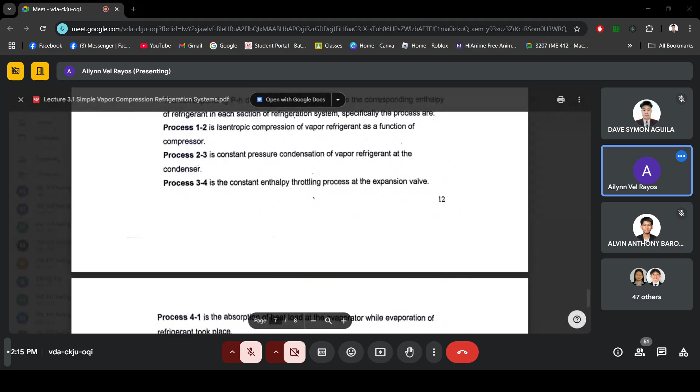Okay, so last week we discussed the standard vapor compression cycle. So ito yung naging discussion, tama ba? Yan, ito yung ginamit natin na lecture from last week. So another lecture was uploaded, additional to, kasabay nung ginamit natin last week. So discuss lang natin how or what are the modifications made in the reverse Carnot cycle, kung bakit tayo nagkaroon ng standard vapor compression cycle, which is a cycle working as a refrigeration system.

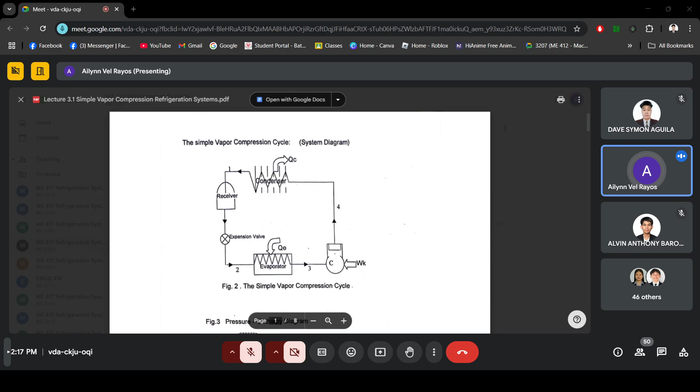So based on our introduction, ito yung ating naging lecture sa introduction, for Carnot refrigeration cycle, what component for the expansion process is a turbine. Kasi sabi nga, based on our Carnot cycle, its main component is a turbine. So ganun din yung ginamit for our reverse Carnot, we have the turbine. But there are some modifications made in the TS diagram of this Carnot cycle to make sure that this will work in an actual process.

Okay, so chat na lang sa GC, Lozelle, kapag medyo naglalag, para dire-diretso yung discussion natin. So ano yung mga modifications that was made here in the TS diagram para magkaroon tayo ng standard vapor compression cycle? So if we are going to compare this Carnot cycle or Carnot refrigeration cycle sa standard vapor compression cycle, ano yung mga naging difference? Naalala nyo pa ba yung diniscuss natin last week? Ano yung mga naging difference dun sa ating standard vapor compression cycle? So, eto.

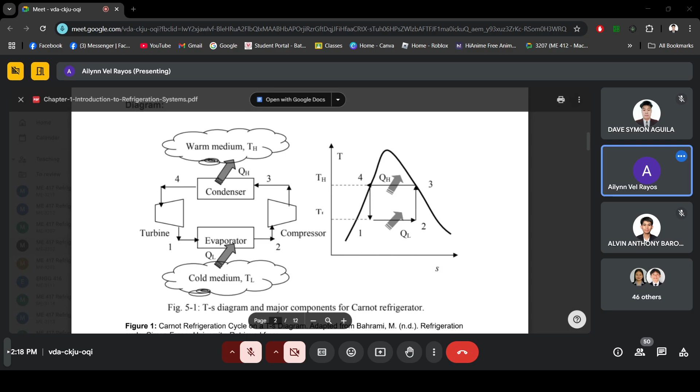Okay, so ito yung ating pH diagram. Disregard nyo muna yung numbering, no? Tingnan nyo muna yung pH diagram, yung itsura niya. So what is the difference of this? Ito yung TS diagram, ito yung TS. Kita ba yung aking cursor? Kita ba? Hello? Hello everyone? Naririnig nyo pa ba ako?

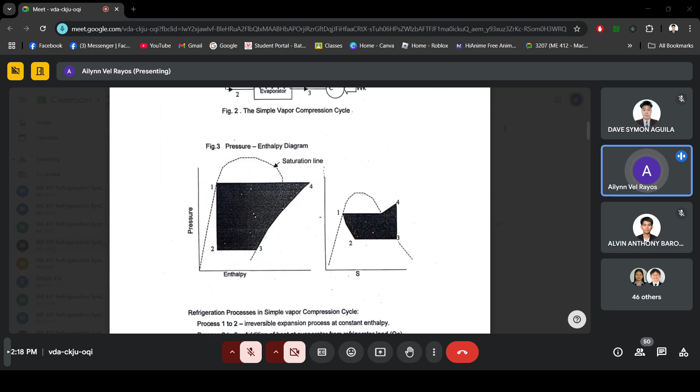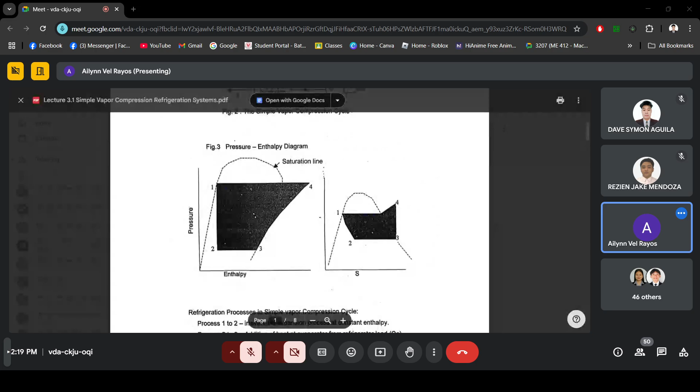Ma'am, hindi po, hindi ba kita yung cursor natin? Opo. Okay, wait lang, wait. Open natin in Google Docs para makita ninyo, kasi parang nakikita naman ata siya. Ito ba kita na? Ito, kita? Kita ba? Parang di pa din po. Hindi po. Hindi ba? Hindi po. So ganito na lang. Wait, ay, ang sara. Ito na lang, I think kita naman na. Kita kaya? Ay, bakit hindi kita? Ito, wait.

So yon, again yung TS diagram. May TS diagram naman kayo dyan, di ba, nung dinrawing ninyo nung last week? Di ba? Pero ito siya. Meron po, mahirap lang mag-share ng iba pang screen. Sabagay, hindi naman kita yung cursor natin. Pero ito yung TS diagram natin, which is tama, di ba? Same dun sa dinrawing nyo last week. Okay, tama ba? Opo, ma'am.

Okay, and then yung ating Carnot refrigeration cycle, ano yung mga nakikita ninyong pagbabago? Or ano yung mga nagbago? Kasi sabi natin, some modifications are made para maging standard vapor compression cycle siya, para mag-work siya in an actual scenario, or mapagana talaga siya in an actual component or equipment na feasible, and at the same time, tinake into consideration yung mga economic situation na meron dun sa reverse Carnot cycle. So based on the reverse Carnot cycle or the Carnot refrigeration cycle, what are the difference in terms of the TS diagram pagdating dito sa ating standard vapor compression cycle? So naalala nyo ba yung sa Carnot?

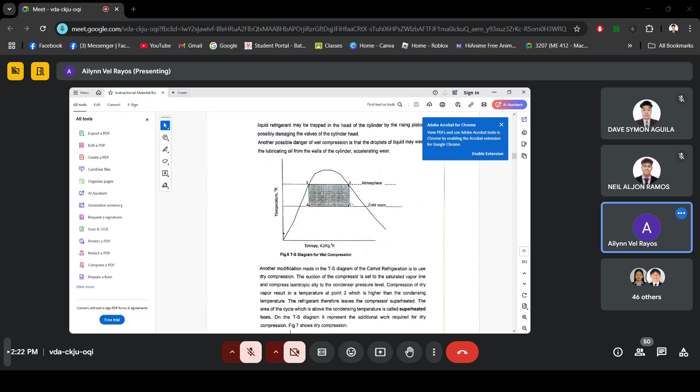Pero dito sa Carnot refrigeration cycle, meron tayong wet compression. So ano ibig sabihin natin ng wet compression? The phase of the refrigerant before it enters our compressor is wet mixture, so meron tayong combination of liquid and vapor. While dun sa standard vapor compression cycle natin, meron tayong saturated vapor. So let us discuss bakit at anong mga nangyari, why it happened.

But before that, let us review this simple vapor compression cycle which we discussed last week. So again, this is the pH and TS diagram of the standard vapor or the simple vapor compression cycle.

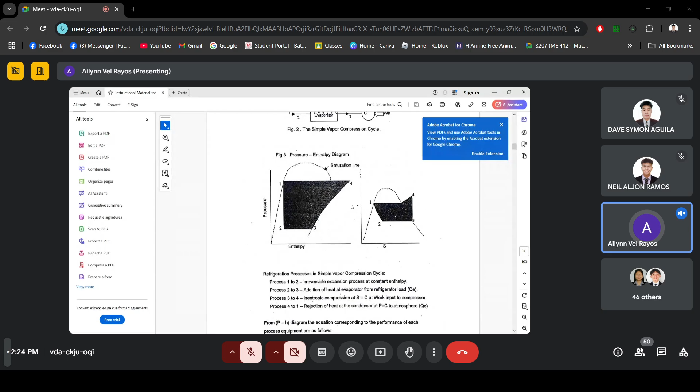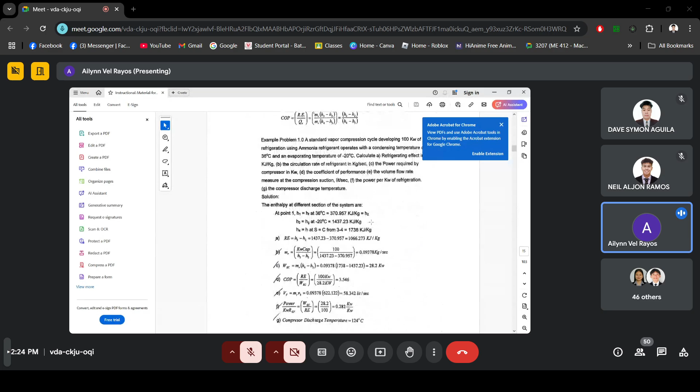This is the component, or the work cycle analysis, the cycle analysis, which is the same as what we discussed face-to-face last week. This is also the same problem we solved before, so just look at that too.

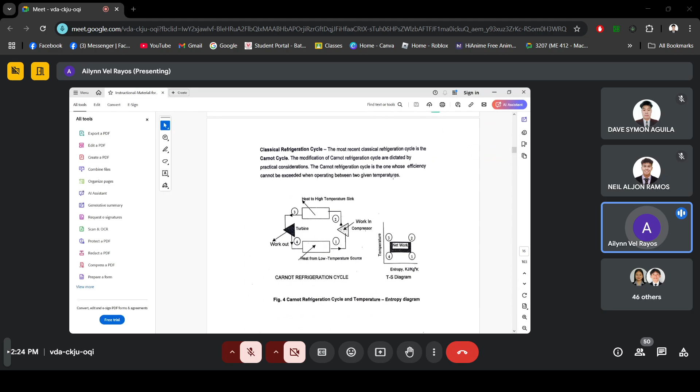This is the classical refrigeration cycle, which is the reverse Carnot cycle. The most recent classical refrigeration cycle is the Carnot cycle, and the reverse Carnot cycle became our classical refrigeration cycle. The modifications of the Carnot refrigeration cycle are dictated by practical considerations. Let's go through those considerations one by one.

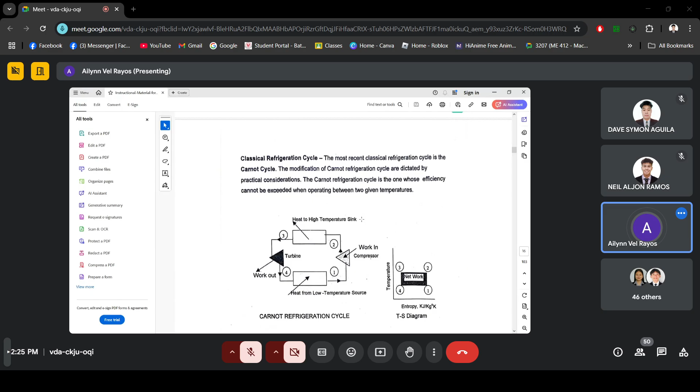The Carnot refrigeration cycle is the one whose efficiency cannot be exceeded when operating between two given temperatures. Imagine we have a saturation line here, where the saturated liquid line touches state point 3 and the saturated vapor line touches state point 2. If we base this on the pH diagram of the simple or standard vapor compression cycle, one modification we see is that after this, state point 1 is already saturated vapor.

At the same time, state point 2 has our superheated, high pressure, high temperature refrigerant - state point 2, superheated. Then 3 to 4 is the TS diagram, and at the turbine we have a constant entropy or isentropic process. In the standard or simple vapor compression cycle, it is no longer isentropic because our turbine was replaced by an expansion valve.

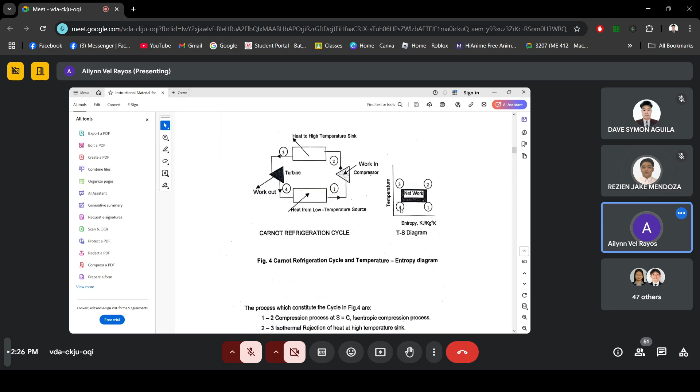This makes our process an isenthalpic process, wherein our enthalpy at state point 3 and 4 is equal. So why did these modifications happen? Let's discuss it.

This was discussed in our introduction part. So consider this other formula for the reverse or Carnot refrigeration cycle. Here, we derived T1 over T2 minus T1 as our COP, or coefficient of performance of refrigeration, which is the ratio of the amount of heat absorbed at the cold room to the net work of the cycle, as referred to the TS diagram.

And the next thing is the performance factor - you just have to add 1 to the COP to get the PF, or the performance factor.

I will give you 15 minutes to solve this problem. I know you're already aware of Q = UA ΔT, in heat transfer. You have to get the UA value, which is in kilowatts per degree Kelvin, wherein the change of temperature is 5 degrees Celsius. Please solve this problem for 15 minutes. I'll give you 15 minutes.

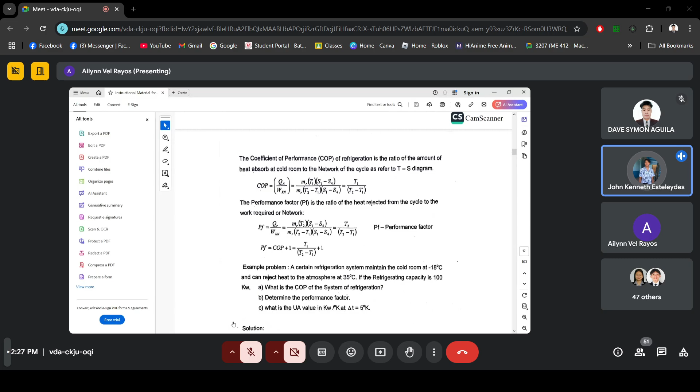A certain refrigeration system maintains the cold room at negative 18 degrees Celsius and can reject heat to the atmosphere at 35 degrees Celsius. If the refrigerating capacity is 100 kilowatts: A) what is the COP of the refrigeration system? B) determine the performance factor. C) what is the UA value in kilowatts per degree Kelvin at delta T equal to 5 degree Kelvin?

Okay, so please solve this for 15 minutes, then we'll discuss it after. This is included in our lecture today, on the whiteboard paper. Is it clear? Please give a thumbs up if it's clear to you.

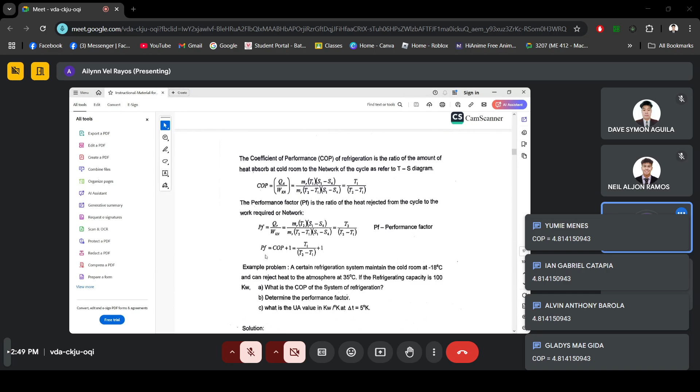This is in the lecture too, so I hope it's clear. For COP, we just use the temperature and make sure again to add 273.15. And then for the performance factor, we just have the UA value. This formula came from heat transfer, right? UA is kilowatt per degree Kelvin, or you can use it directly. Since the unit is given there too, it's more unit analysis if you're not aware of the formula, because what's being asked there is kilowatt per degree Kelvin.

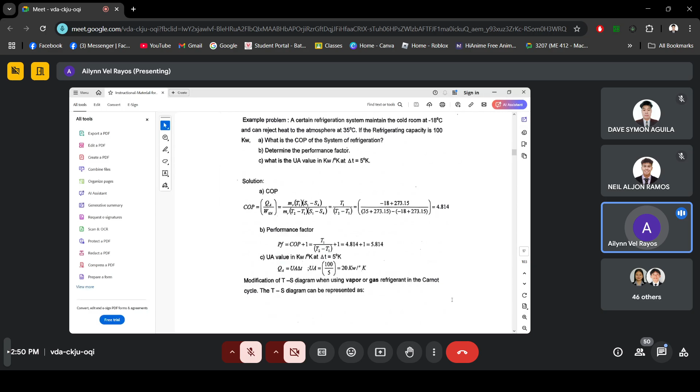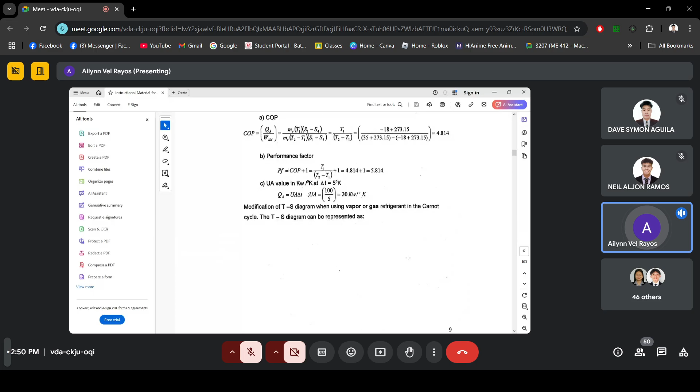Thank you. So here are the modifications of the TS diagram when using vapor or gas refrigerant in the Carnot cycle, which is represented by this one.

Okay, so since in a gas cycle, our working fluid, meaning we see it as gas, it cannot be liquid or change phase. It's really just gas. So that means if there is an addition of heat, we see it in the rising of temperature. If there is a condensation or rejection of heat, we see it in the lowering of temperature. So that's what this means.

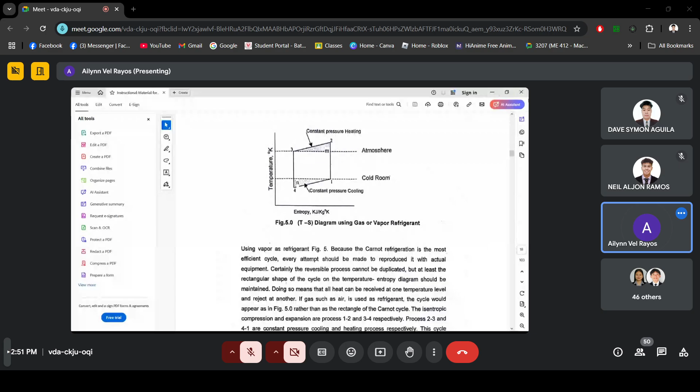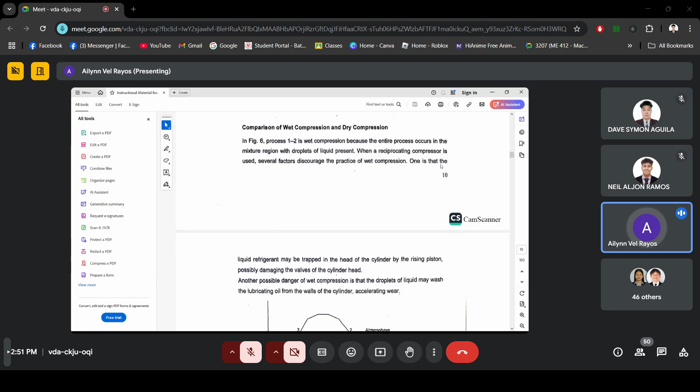So let's focus on the comparison of wet compression and dry compression. As I mentioned earlier, we see the TS diagram of a reverse Carnot refrigeration cycle is in the wet mixture before it enters the compressor. So that means in that case, we will have wet compression. At state point 1, we have a wet mixture entering the compressor.

So that's called wet compression. In figure 6, process 1 to 2 is wet compression because the entire process occurs in the mixture region with droplets of liquid present. So when a reciprocating compressor is used, these are the factors that discourage the practice of wet compression.

So that's why we transition to dry compression. So what are the several factors that discourage wet compression? One is that the liquid refrigerant may be trapped in the head of the cylinder by the rising piston, possibly damaging the valves of the cylinder head.

That's one. So to avoid damaging the valve of the cylinder head, we use dry compression, because wet compression or liquid refrigerant may be trapped in the head of the cylinder, which may cause damage to the valve of the cylinder head.

And another possible danger of wet compression is that droplets of liquid may wash the lubricating oil from the walls of the cylinder. That accelerates wear. This is related to the topic we discussed about refrigerants, in the 7th section I think, about oil and refrigerant. From that, we discussed what lubricating oils are used in the compressor.

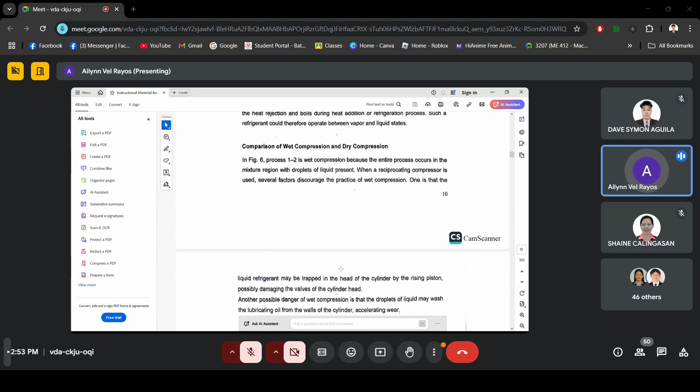So from wet compression, what we did is modify the TS diagram so that instead of compressing it as a wet mixture, we make it a saturated vapor. So another modification made in the TS diagram of the Carnot refrigeration is to use dry compression. The suction of the compressor is set to the saturated vapor line and compressed isentropically to the condenser pressure level. So compression of dry vapor results in temperature at point 2, which is higher than the condensing temperature.

So what was the result? There are two things. Aside from making it saturated vapor at the end of the evaporating process, it needs to be saturated vapor before entering the compression process. So another result is that we get...

We get high pressure, high temperature refrigerant. Because in our Carnot refrigeration cycle, when we undergo wet compression, the compression process will make the refrigerant only saturated vapor. But if it comes from saturated vapor with the same compression process or work input, we will get high pressure, high temperature steam, which is clearly shown because we have a superheated horn in the TS diagram.

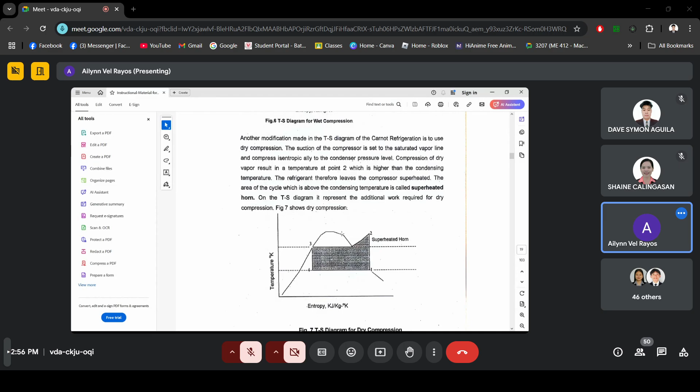Okay, so ibig sabihin, kita na natin yung saturated vapor at kung bakit siya nagkaroon ng superheated na part. Okay, so another...

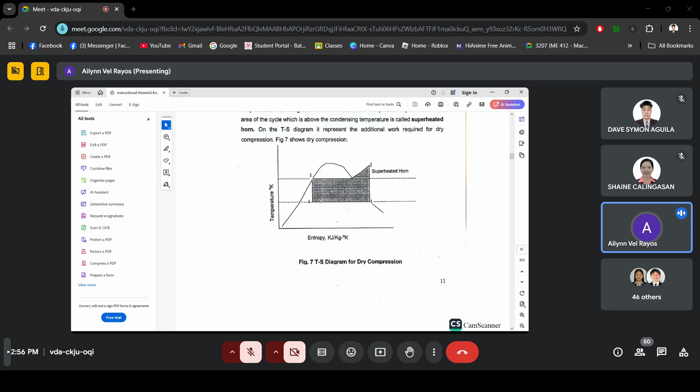Is the expansion process. So kung mapapansin nyo, dun sa TS diagram, slightly, pag ganito yan, line dyan. So naka-slightly yan, meaning yun yung nagsashow na isenthalpic process siya. Kasi dun sa ating Carnot refrigeration cycle, meron pa tayong straight line showing that we have constant entropy, o yung expansion process natin.

Is just isentropic, which is process 3 to 4 dito. So another modification made in the Carnot refrigeration cycle TS diagram is the expansion process. So ano yung mga dahilan bakit siya kailangan baguhin? Ano yung mga dahilan bakit kailangan siyang i-modify? So one main reason is kung mapapansin ninyo sa turbine, explain naman siya dito.

So again, another revision on the Carnot dry compression is made to alter the expansion process. So the Carnot cycle demands that expansion takes place isentropically and that the resulting work be used to help drive the compressor. So maalala nyo, expansion process sa turbine kapag Carnot cycle, meron tayong work output. And yung idea na yung output ng turbine natin pwedeng gamitin na input work doon sa compressor is a good idea,

But there are practical difficulties that mitigate the use of the expansion engine. So ano yung mga naging dahilan? So merong mga output work, but sabi dito, the first practical difficulty is that the possible work that can be derived from the engine is a small fraction of that which must be supplied to the compressor.

So ibig sabihin, yung kukunti yung work output ng expansion engine natin, kung siya yung ilalagay natin. Oo, ibig sabihin, mapapababa niya yung, ano ba yung main purpose natin doon sa process na yon? Mapababa yung temperature, ay yung pressure natin from condensing pressure to evaporating pressure. And based on the Carnot refrigeration cycle, ang gamit doon is an expansion engine.

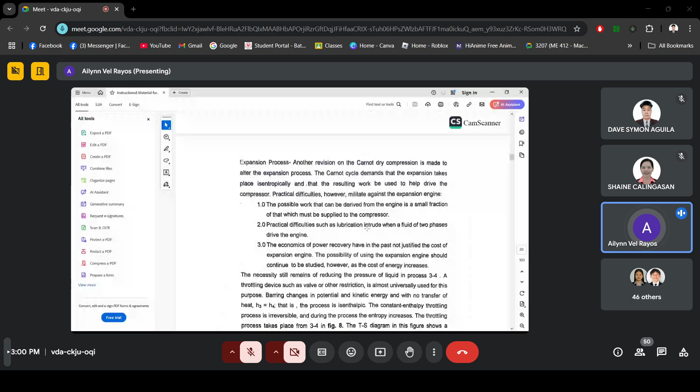But in here kasi, kung mapapansin nyo dun sa ating TS diagram, saturated liquid siya, hindi pa siya vapor, no? Liquid totally siya. So ibig sabihin, because of that, practical difficulties such as lubrication intrude when a fluid of two phases drive the engine.

So that's the three reason why there is a reason for some modification para mapagana siya in an actual process. So the necessity will still remain at reducing the pressure of liquid in process 3 to 4. That's the main function, mapababa yung pressure from the condensing pressure to the saturated to the evaporating pressure. So a throttling device such as valve or other restriction is almost universally used for this purpose.

So barring changes in potential and kinetic energy and with no transfer of heat, H3 is equal to H4, so ibig sabihin, ang process natin is isenthalpic process. The main reason kung bakit siya nakatagilid dun sa TS diagram natin and tuwid naman siya dun sa pH diagram, yung process 3 to 4 natin dito, yung numbering natin.

But on previous 3 to 4 pala siya. 3 to 4 nga siya. Dun sa na-drawing nyo last week. Yun yung dahilan kung bakit yung process 3 to 4 natin is tuwid or isenthalpic process. Kasi instead of the use of the turbine or expansion engine, ang ginamit natin is a valve.

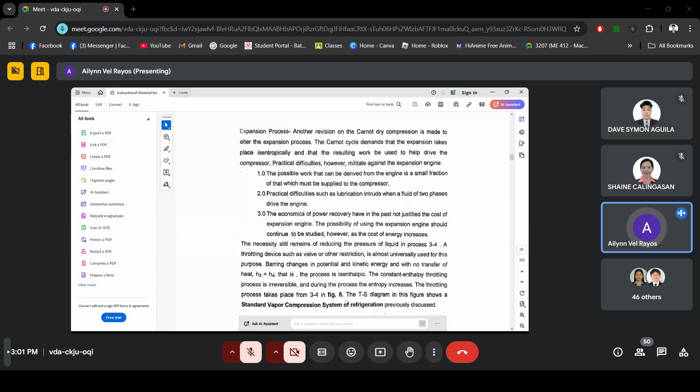So the throttling process takes place from 3 to 4. The TS diagram in the figure shows a standard vapor compression refrigeration cycle, which we previously discussed. Is this clear? Are the reasons we discussed clear? What you should put in your lecture is to include all those reasons in bullet form, based on your understanding of what we discussed. Thumbs up if this is clear.

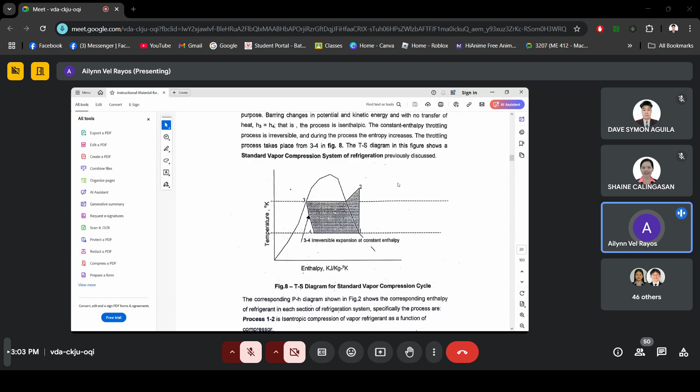So again, include this in your lecture with a supporting diagram so you understand this better. We already discussed these processes last week, so we don't need to discuss it further. Is this clear? Thumbs up if we're clear on this. Then we'll move on to the next lecture.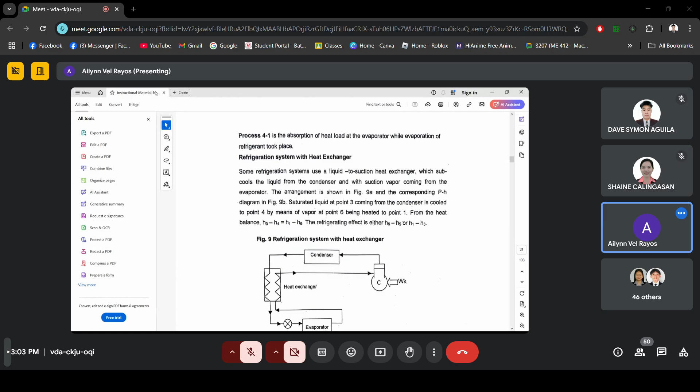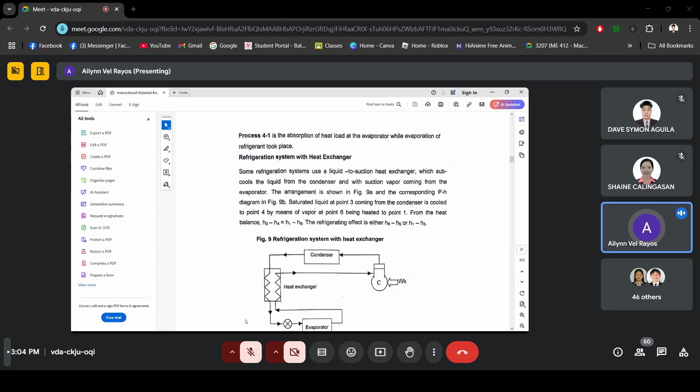This is the second part before we move on to the discussion of the actual vapor compression cycle. This is the effect of different operating conditions - for example, when the pressure increases, the condensing temperature increases, or when the evaporating temperature increases or decreases - those kinds of conditions are also something you need to know. We don't have any calculation for this one because our calculation here is the same as the calculation for the standard vapor compression cycle.

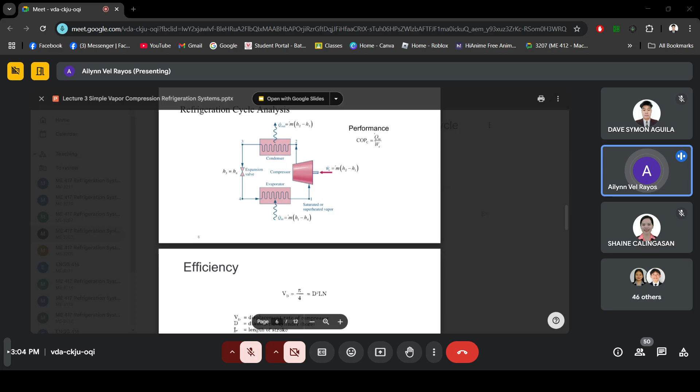So this is a compilation of the different effects on operating conditions. Again, this is just a compilation of what will happen - for example, the first one is if there is an increase in the vaporizing temperature. What is our vaporizing temperature? So instead of -10, the vaporizing temperature is increased to 5 degrees.

So what will happen to our other components? For the COP, as you can see, increasing the vaporizing temperature increases the COP. Another thing is, if you notice, the difference is small, but as you can see, the refrigerating effect (RE) becomes larger. This line here, and the line from 4 to 1, versus 4-prime to 1-prime - you'll notice it's longer, only slightly, but still longer. This means our refrigerating effect, our QA, increases.

And when that increases, what is the relationship between mass flow rate and heat added? Don't we have the formula that heat added equals mass flow rate multiplied by the change in enthalpy? So what is the relationship between our refrigerating effect or QA and our mass flow rate? Is it directly proportional or inversely proportional?

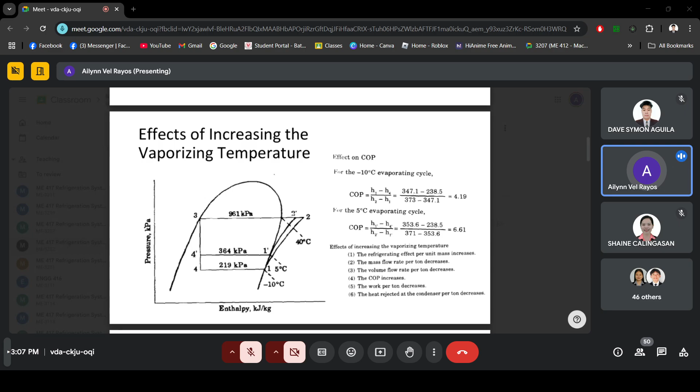Based on our equation, what we have here is correct - there is a decrease in mass flow rate with an increase in refrigerating effect, because their relationship is inversely proportional. Another thing is that as mass flow rate changes, volume flow rate also decreases. And as you can see, based on the calculation, the COP increases and the work per ton decreases. Also, the heat rejected at the condenser per ton decreases. So that is the effect of increasing vaporizing temperature.

Another case is an increase in condensing temperature. If there is an increase in condensing temperature, like this one, from 40 it became 50 degrees Celsius. This means if it decreases instead, you just reverse these values here. But you can also solve these on your own. Again, this is a compilation.

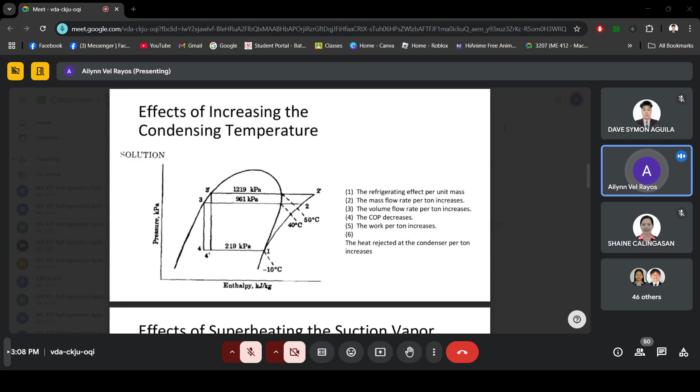For an increase in condensing temperature, the refrigerating effect per unit of mass - this part is incomplete, you should add to it - the refrigerating effect per unit of mass, if you notice, becomes smaller. It decreases. Since there is an inverse relationship between RE and mass flow rate, the mass flow rate increases. The volume flow rate per ton also increases. The COP decreases, and the work per ton increases. The heat rejected at the condenser per ton also increases. Those are the effects of increasing the condensing temperature.

This is also the effect of superheating the suction vapor. Normally in the standard vapor compression cycle, what leaves our evaporator is saturated vapor. So what if there is superheating? What happens when we have superheating? The effects of superheating the suction vapor: number one, the refrigerating effect per unit of mass increases - this is for useful cooling. The mass flow rate per ton decreases, the volumetric flow rate per ton decreases, the COP increases, and the work per ton decreases.

So if superheating occurs without useful cooling, this will happen: the refrigerating effect stays the same, as well as the mass flow rate. The volume flow rate increases, the COP decreases, and the work per ton increases. The heat rejected at the condenser per ton also increases. So those are the effects of superheating the suction vapor. As you can see, our COP increases for useful cooling, and without useful cooling, our COP decreases.

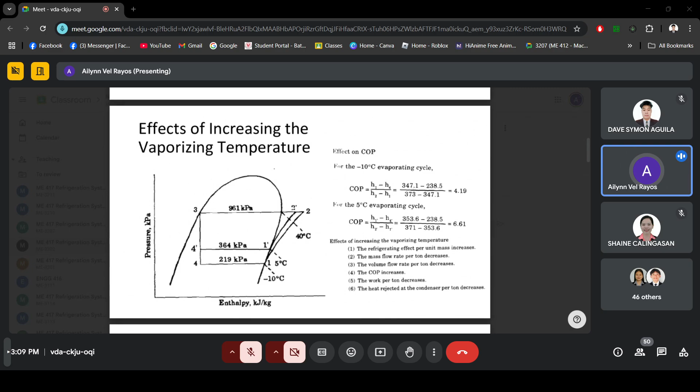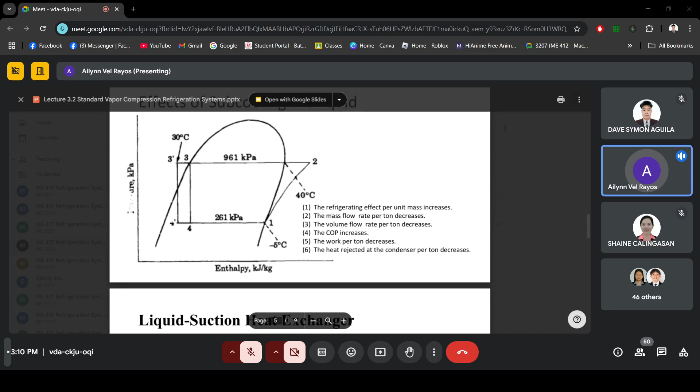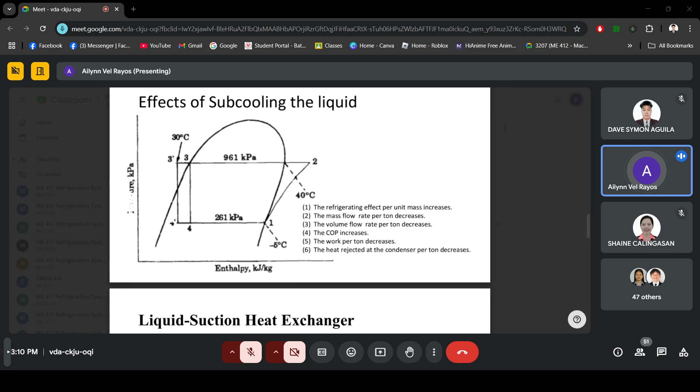Another thing is subcooling of the liquid. Do we need to subcool? Mainly, yes, because it increases the COP, but you also have to take into consideration other factors. For subcooling the liquid, the refrigerating effect per unit mass increases. As you can see, from 4' to 1, the RE becomes longer because more heat is added or absorbed by the refrigerant in the evaporator coils. Since there is an inverse relationship between RE and mass flow rate, the mass flow rate decreases, same with the volume flow rate. Subcooling the liquid can increase the COP, the work per ton decreases, and the heat rejected at the condenser per ton also decreases. So those are the effects.

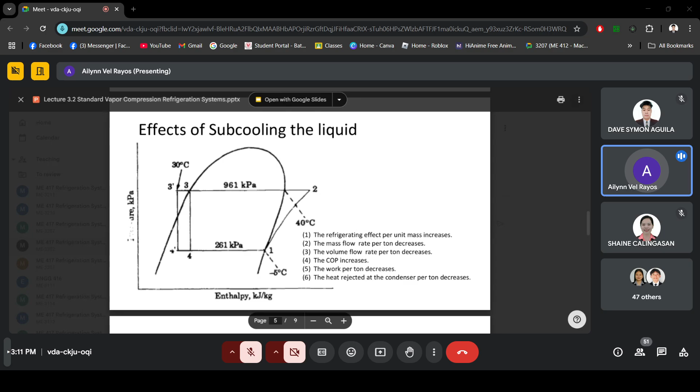Okay, so let's try to have this liquid to suction heat exchanger. This is subcooling and superheating the vapor - superheating the vapor and then subcooling the saturated liquid. But this is with the use of a liquid to suction heat exchanger. So this is what we call useful cooling. With the liquid to suction heat exchanger, we have an additional component.

Here we use a heat exchanger as an additional component, but we can also base our calculation on the standard vapor compression cycle. So take note that we just have an additional component to consider. What are the state points where our heat exchanger is? Process 6 to 1, which is the superheat, and then process 3 to 4, which is the subcool. So you have to take into consideration other variables also to check whether the values you can use are the same.

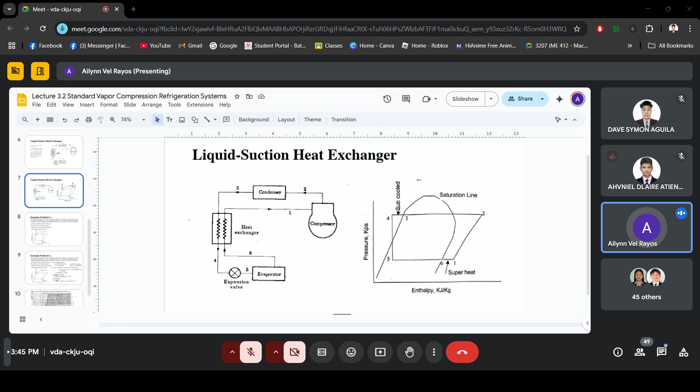Ayan. So kung mapapansin nyo, ano yung mga condition, kopyahin natin para isa-isa lang. So ano yung mga condition na sabi sabihin dito, so meron tayo ditong superheated, state point 1 and 2. So since meron tayong H1 na nakuha through energy balance, ano pa yung isa na condition para mahanap natin yung entropy? Yung entropy kasi at state point 1, kailangan natin yan at state point 2 kasi compression is isentropic.

So kailangan natin palagi kuhanin yung inlet entropy sa compressor para magamit natin kapag isentropic compression siya. So meaning we need to get entropy 1 dapat hanggang entropy para makuha natin yung S2. Yung S2 naman, we're going to use it to get the enthalpy. So, bale, ito ang kukunin nyo sa chart. Ano mga kukunin sa chart? So, S2, which is equal to S1, which is equal to

entropy at anong mga condition. So, the first one is H1. And ano pa yung isang condition? Ano pa? Ano pa? So, wala naman yung changes ng pressure. So, pwede niyong gamitin yung P1, P1 or Psat at the evaporating temperature, which is -10.

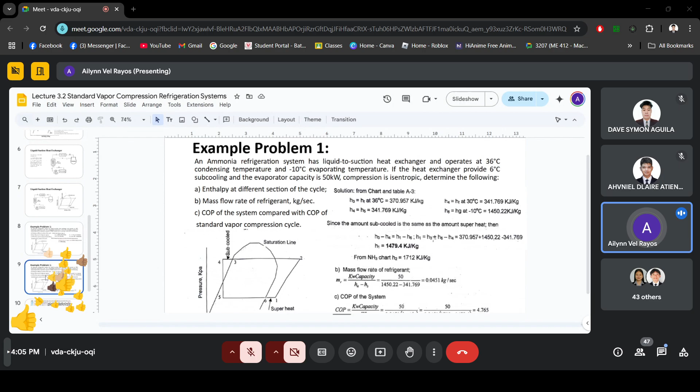Ayun, so discuss na natin sagot. So if you're going to use 1712, then we'll get the COP, the mass flow rate, which is 0.0451, and yung ating COP na 4.765. So this was already in your lecture.

So what you should do for the rest of the time that we have here is to finish this problem. Paano ba? Okay, ito. Yung sa lecture natin, tsaka itong isang sample problem na to, kasama na to sa ipapasa. And then for now, send ko muna dito sa GC natin na 3207.

Ito, ayan. Okay, so itong dalawang problem set na to, yan, this is for standard vapor compression cycle din. So wala pa din tayo masyado na-discuss for actual, so we'll discuss that, lalo na yung computation next week. Malinaw ba? Any question, clarification?